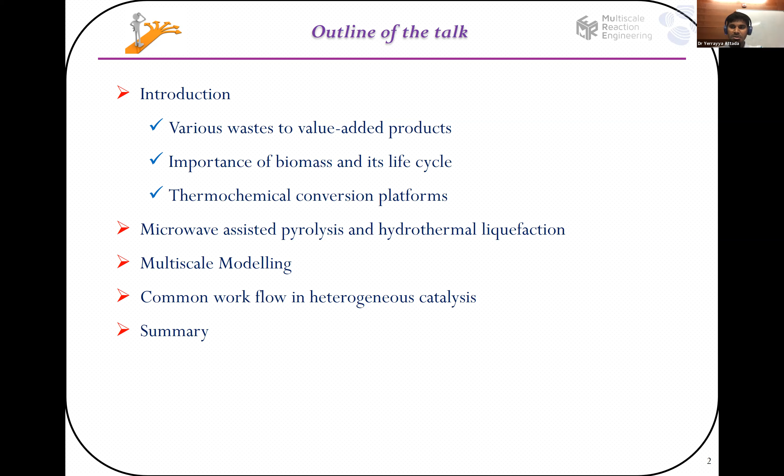Good afternoon, everyone. Today I will discuss the different thermochemical conversion processes available and the ways we can convert waste to valuable fuels and chemicals. This is my topic. I completed my PhD at IIT Madras, and currently I'm working as a postdoctoral fellow in MuRE, the Multi-Scale Reaction Engineering Group. My talk is mainly about the various wastes to valuable fuels, the importance of biomass and its life cycle, and the different thermochemical conversion processes available. I'll mainly discuss my work on microwave-assisted pyrolysis and hydrothermal liquefaction, and after that give a brief idea about multi-scale modeling, and also the common workflow in heterogeneous catalysis from a molecular simulation point of view.

This is my idea of the different ways available to convert waste to fuels or chemicals. You can see here CO2, a global warming greenhouse gas, and CH4, methane, converted to hydrogen, and ammonia to hydrogen - there is value there. Biomass includes various types like plant agro residues and food waste, residues from industries, and municipal solid waste like plastic waste and construction material. All of this needs to be processed using different processes, which I'll discuss later - this is the whole idea of how these can be transformed into useful fuels and chemicals.

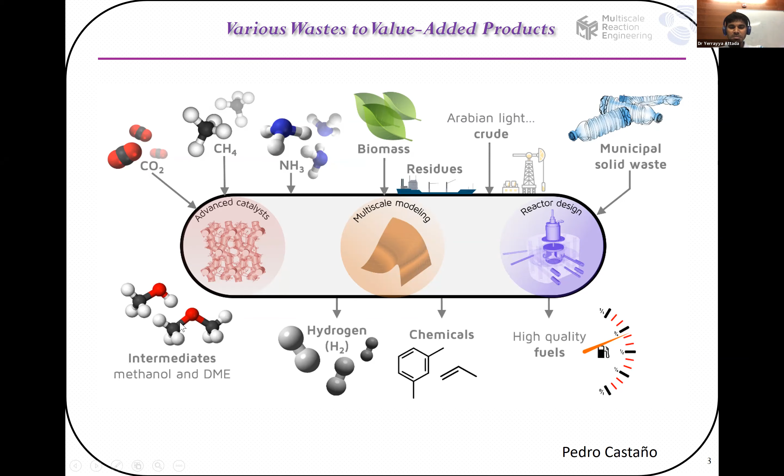From municipal solid waste, biomass, and different kinds of waste, biofuel production is separated into different generations based on the biomass: first generation, second generation, third generation, and fourth generation. First generation is edible fuel - meaning food kind of fuels. We cannot sustain on this because we need food to eat, and we cannot convert these into fuel because of the large population - we need so much food. That's why the next step is second generation.

In second generation there are different biomasses like municipal solid waste, industrial waste, crude glycerin, and straws - these are agro residues. These can be converted to fuel. That is the second generation.

Third generation is algae. You can see algae converted to normal biocrude using hydrothermal liquefaction. This is the best process for algal biomass because it's a wet feedstock - more than 50% water content. That's why we use hydrothermal liquefaction to convert this into biocrude.

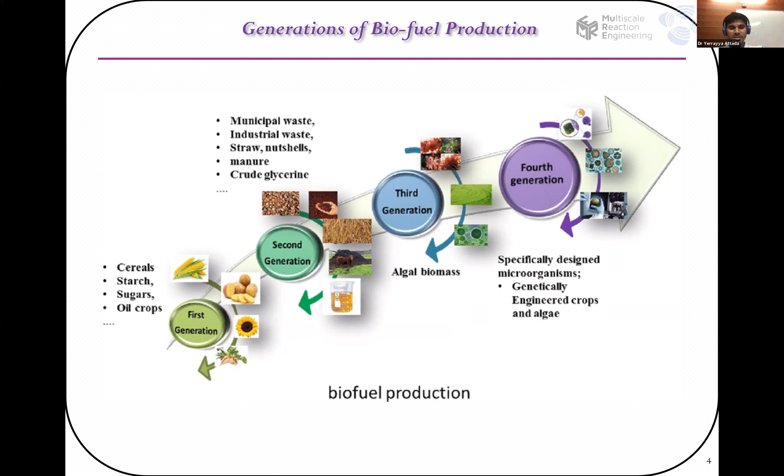Fourth generation is microorganisms. Here you can convert these also like algae into fuels. These are the four generations, and we are mainly focusing on second and third generation to convert waste into fuels. I'm showing here the global and India scenario - what generations are more common, like municipal solid waste.

Here you can see India generates around 11.95% of municipal solid waste, and China generates 15.55%. United States generates the same as India, but has a less population compared to India—India has 18.05% of population and US has 4.4%. That means the more generation of municipal solid waste, per capita, is in the United States.

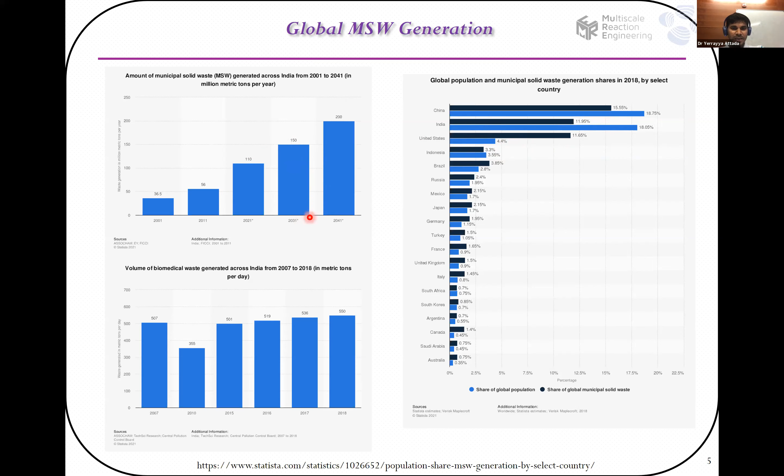We can convert this municipal solid waste into useful fuels by using different processes. I'll explain better in the next slides.

This is how you can reduce municipal solid waste through waste management. First are the 5 R's. The first one is reduction—you need to reduce as much as possible the consumption of plastic, mainly plastics, because we can reuse waste into its current form.

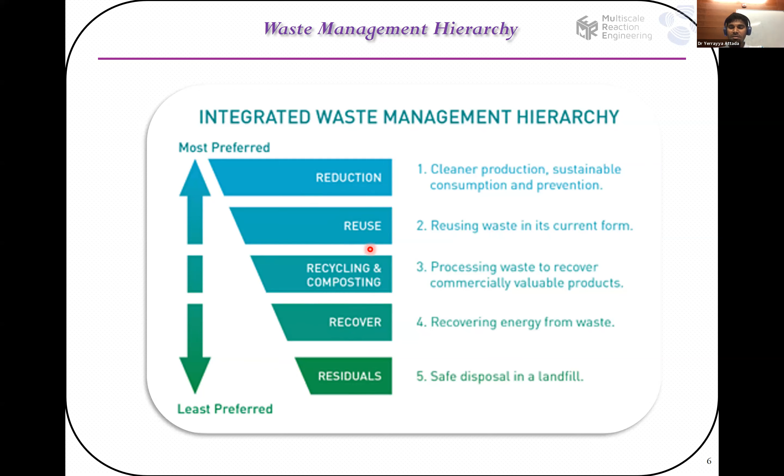The next step is reuse—you can reuse that plastic again and again. Then recycle—you can generate different valuable products by using these plastics. The fourth one is recover—you can use different thermochemical processes to convert the waste to energy. And the final one is landfill, where you dispose safely. These are the 5 R's you need to keep in mind to use plastics in a valuable manner.

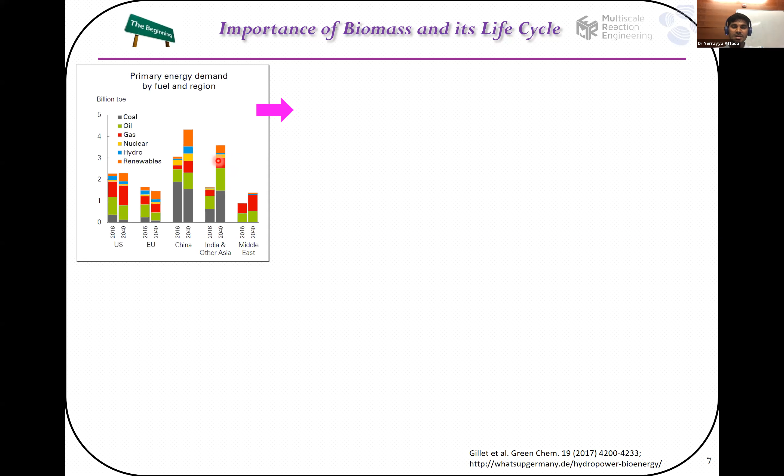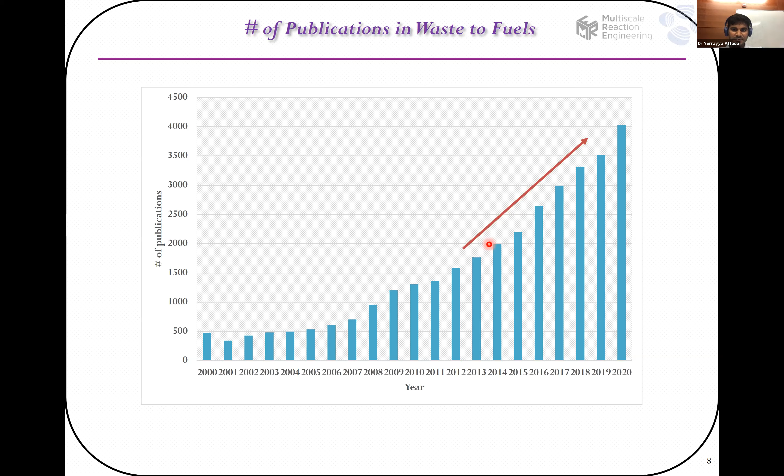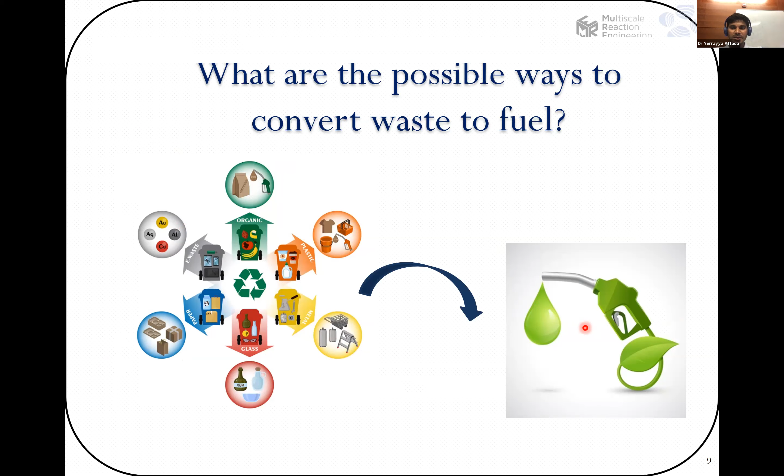This is the main aim: what are the possible ways to convert waste to fuel? These are the different ways you can convert it into useful fuel. I'll explain in the next slide the different thermochemical conversion processes available.

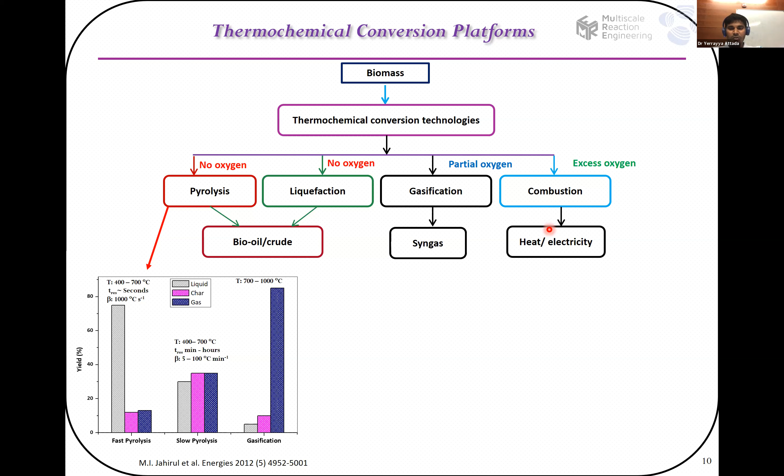Combustion is mainly used for heat and electricity. The major problem when we use combustion with biomass is the ash percentage in biomass. It will create a problem of sintering and fouling of the reactor.

These are different companies looking at converting plastics to biofuel. This one is from Paterson Energy, a Chennai-based company. They generate almost every day 1 ton of plastic, converting it to 800 liters of fuel, which can be used as furnace oil, and they can upgrade it to gasoline using hydroprocessing technology.

There are different companies available. Here you can see clean burning fuel made from used fryer oil from restaurants and commercial kitchens - they use those oils to convert them to normal fuels. Here, Sierra Energy uses a gasifier to convert waste to syngas, then converts it to methanol using Fischer-Tropsch synthesis, which can be used for other chemical processes.

Here they use municipal solid waste, hazardous waste, and medical waste also. Whatever the waste, they do gasification and convert it to useful chemicals. And here also you can see plastic to oil - they transform plastic waste into fuel with 86% conversion efficiency. These are the major companies available in this space.

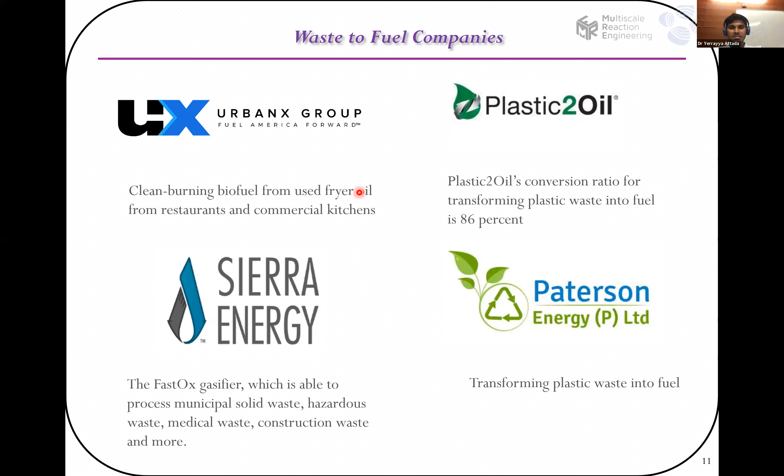This is a case study. When we use COVID-19 masks, these are also converted to useful fuel. This is a major amount - these masks are just thrown out after single use. We use disposable masks, and they are converting them to fuel. This is the scenario nowadays, because from 2020 onward, this is happening.

There's huge waste generation, and this is just pyrolysis they are doing - converting it to fuel range hydrocarbons. That is the main advantage of using pyrolysis, just generating heat or fuels.

This is a simple experiment, not much cost involved. You can just take a tubular furnace, a normal furnace, and heat it directly using a quartz tube. These are the quartz wool - they insert the feedstock on both sides, and then the vapors generated by heating this feedstock are sent to an ice bath, because we need to get the liquid by condensing this process, and then they send it to the micro GC.

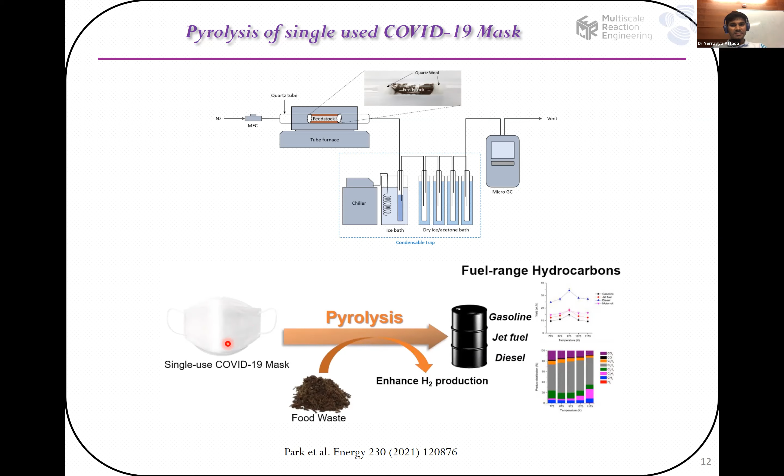This is the homemade setup we are using in IIT Madras. This is a research grade setup, but we can use a normal microwave, homemade microwave, to convert it for reaction purposes. Actually, in IIT Madras, we started with a normal microwave, same as what is available in homes, and that can be converted to a reactor as an initial step in microwave pyrolysis. But nowadays research grade microwaves are also available to convert this waste into useful products. This is just a normal procedure, and this is a research grade one.

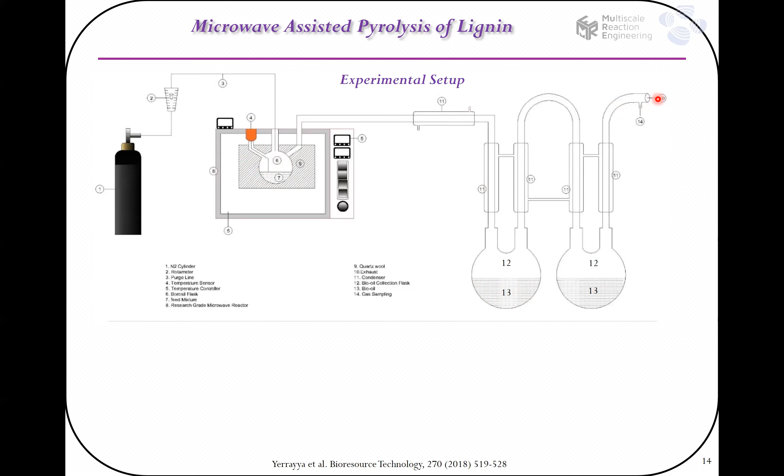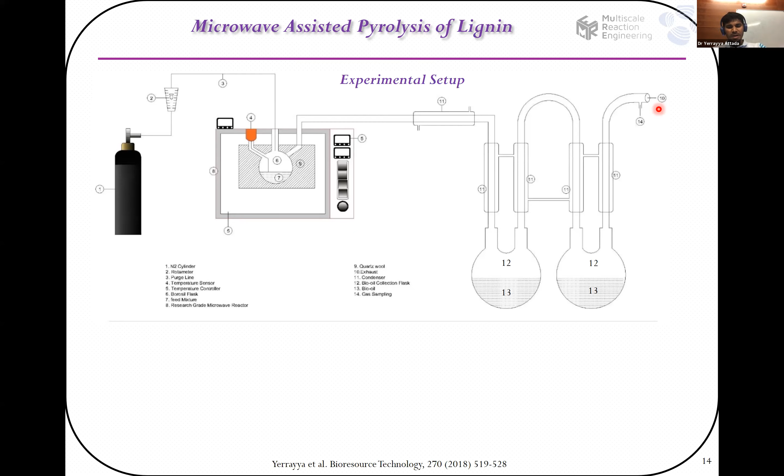Here this is a normal Borosil flask as a reactor, and these are the different K-type thermocouples we are using. The microwave heats the reactor at an operating temperature of nearly 600 degrees centigrade, and then the generated vapors go to two condensers, which we use to collect the oil. The final gas can be exhausted out, or we can collect these gases in a balloon, and you can reuse this gas for heating purposes, like normal homemade heating or whatever, we can heat it using this gas.

These are the analyses we can use on the bio oil, like elemental analyzer, which will give you the composition of the bio oil, such as carbon, hydrogen, nitrogen, and amount of oxygen. And when we use HHV, this is by using a bomb calorimeter, you can calculate the heating value. GCMS will give you the compounds involved in the bio oil. These are the major analyses of biocrude, and there are also some other advanced techniques.

Those are SIMDs, simulated distillation, where you can directly get what compounds are there, it will give you a spectrum directly. And GCGC, there are different techniques available to identify the compounds in a bio oil.

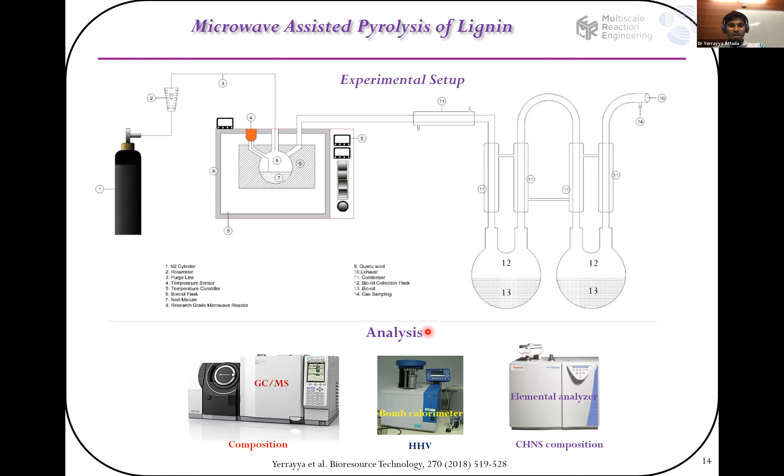These are the things you can see here, when I'm using microwave assisted pyrolysis of lignin. I have already shown lignin has a more amount of phenolic compounds. Here you can see the lignin. When we increase the lignin to activated carbon ratio, this susceptor is used in microwave pyrolysis to heat the feedstock fast. The advantage of the susceptor is that it heats the feedstock, because the feedstock has a low dielectric constant, that's why you need to use a susceptor as an absorber.

And at 10:90, this is the different spectrum, different composition available. You can see here simple phenols, guaiacols, and syringols are the most generated ones, because lignin contains more amount of phenolic linkages, meaning it will convert to more amount of phenols.

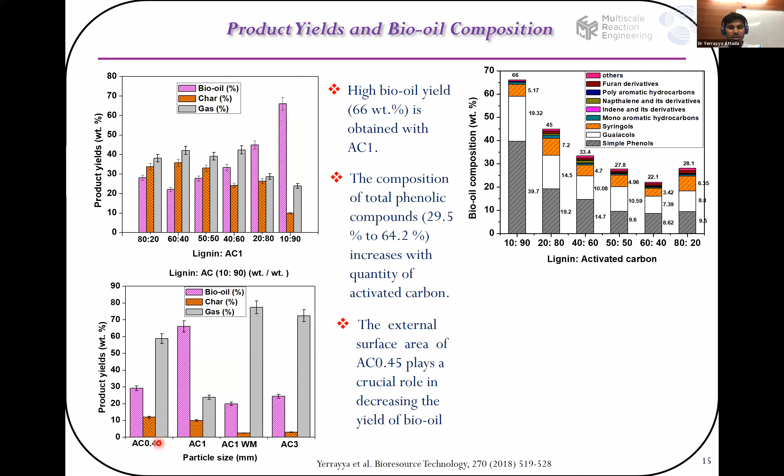If you see, using different amounts of carbonaceous susceptors, that means activated carbon 0.45, activated carbon 1, and activated carbon 3 — these are different sizes of activated carbon — activated carbon 1 gives you a high amount of bio oil. This is because the moisture present in the activated carbon is less, and the external surface area is medium compared to activated carbon 0.45. Activated carbon 0.45 has a higher amount of moisture, which converts to less heating, meaning it converts to bio oil at a very low percentage. You can see activated carbon has the highest amount in all the cases.

The simple phenols, guaiacols, and syringols are the major amounts because lignin contains more amount of phenolic linkages.

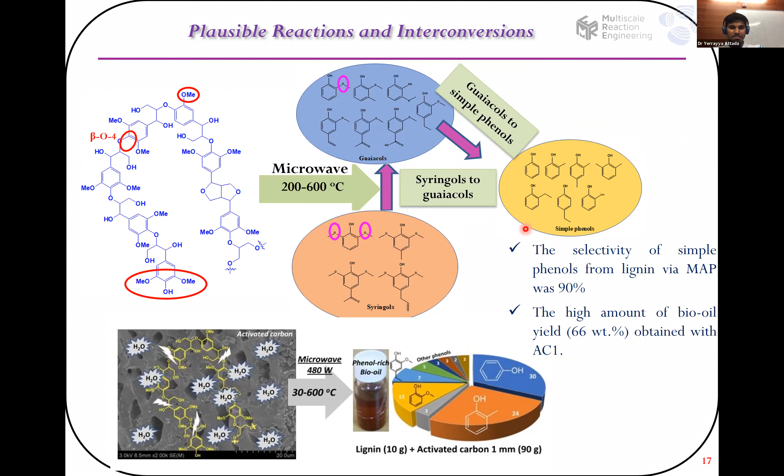And the next one is hydrothermal liquefaction. If you have any questions, please stop and ask. That's not a problem.

Here in hydrothermal liquefaction, you can see the difference between pyrolysis and liquefaction. In pyrolysis, drying is necessary, but in liquefaction there is no need of drying. The temperature for pyrolysis is 350 to 650, and for liquefaction it's 200 to 400 degrees centigrade. That's not the important part, but you can see the oxygen content and heating value - these two are the main important factors. Oxygen content is 10 to 20%, and heating value is 30 to 40, meaning very high heating value, same as gasoline and diesel.

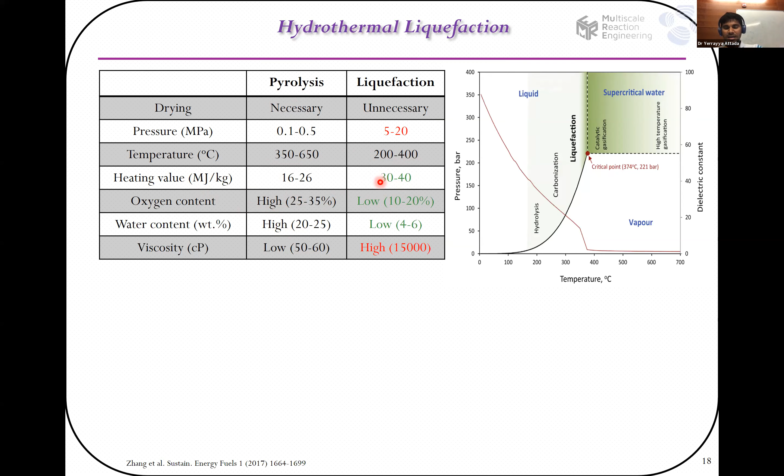The main use of hydrothermal liquefaction is - you can see here - fossil fuels are formed by exposure of biomass to high temperature and pressure underground for many years, whereas a liquid fuel in HTL is obtained within hours or even minutes. That is the main advantage - we can generate biocrude within hours or even minutes by using hydrothermal liquefaction.

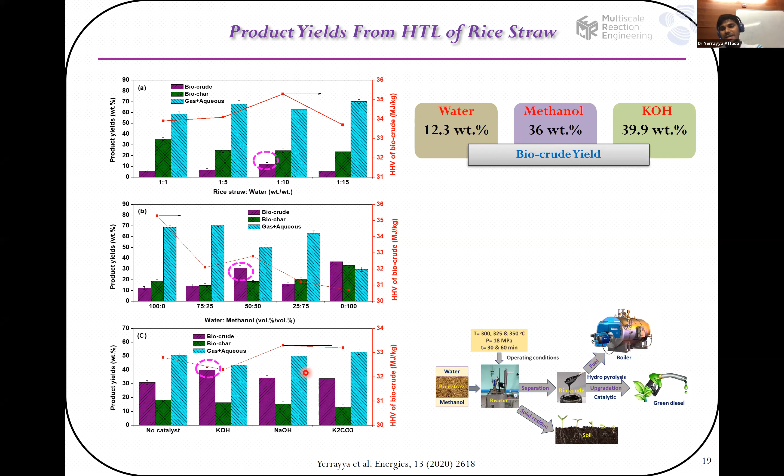You can see when we use water as a solvent, we got 12.3% biocrude. When we add methanol, it increases to 36 weight percent. When we add catalyst to the already available methanol and water ratio, we got 39.9 weight percentage, with HHV also in the range of 31 to 35. We also calculated the energy consumption ratio and energy recovery of the system.

And here you can see the comparison. This is

Company detail, Reliance Industries. They are using different processes here. First one is just power generation, second one is biochemical process, third one is catalytic pyrolysis and anaerobic digestion, and fifth one is HTL. You can see comparison between the efficiencies, the thermal efficiency between different processes. Here the thermal efficiency of hydrothermal liquefaction process is higher, that is 66%, because you can use wet biomass directly compared to normal biomass. When we use dry biomass, it needs more energy consumption compared to wet biomass processing. That's why thermal efficiency is 66% for hydrothermal liquefaction.

This is from Reliance Industries. They are already doing hydrothermal liquefaction process at pilot scale. They have already done lab scale, and now they are going for pilot scale. It's not yet commercialized, but it's going to be commercialized, because it has more advantage compared to normal pyrolysis.

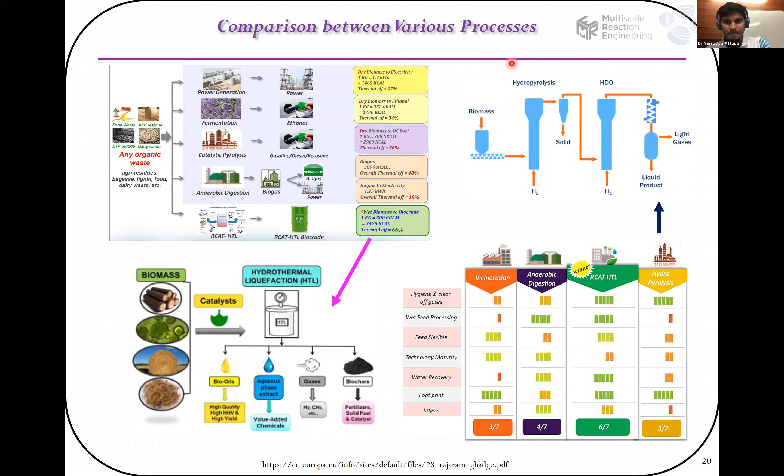Yeah, this one. Actually here there is a more amount of phenolics, that's why its color looks clear. And if you see, lignin-to-activated-carbon has a more amount of tar compounds. Tar compounds means polyaromatic compounds, that's the recombination of single phenolics to normal aromatics to polyaromatic conversion. That's why it looks like a more tarry kind of thing. That's what I explained here.

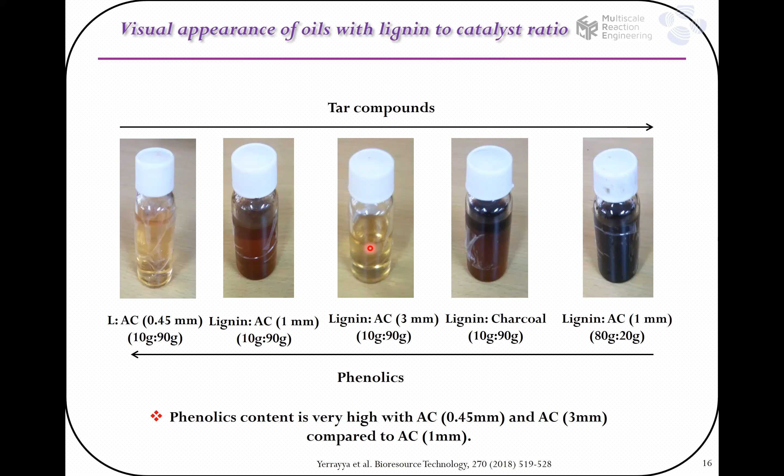Yeah, this is a Van Krevelen diagram. This is how people decide oxygen-to-carbon ratio versus hydrogen-to-carbon ratio. If you see biomass has the highest oxygen-to-carbon ratio and also a certain hydrogen-to-carbon ratio. If you see plastics, they have a very high hydrogen-to-carbon ratio and low, less than 0.1, oxygen-to-carbon ratio. The main aim is to convert this biomass to this range, like the plastics range.

That is the aim of this thermochemical conversion and upgrading processes. When we use initial biomass in normal pyrolysis, it will convert to something like plastics or bio-coal kind of material. But when we use an upgrading process like hydroprocessing, such as catalytic hydropyrolysis, this will convert the remaining oxygen through a hydrodeoxygenation process. If you use hydrodeoxygenation, it will convert it to a gasoline range of fuels. That is the main aim of this biomass conversion process.

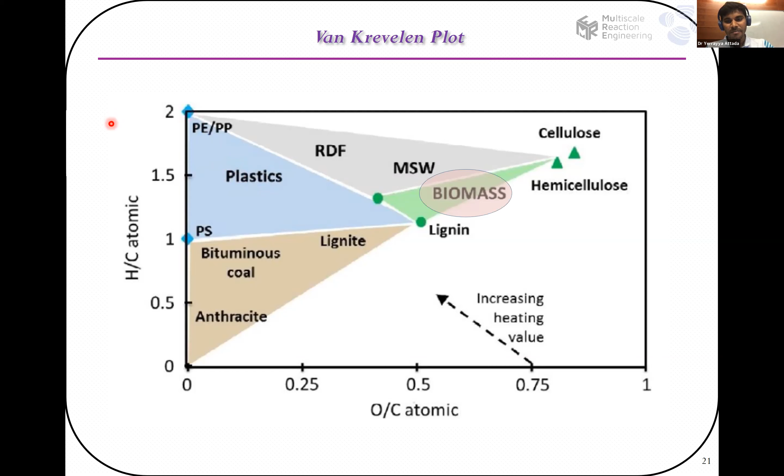Yeah, this is what I am explaining here, these are the different processes. Whatever I mentioned previously will finally go to catalytic hydroprocessing, then convert to gasoline or diesel. Wet biomass can be processed by hydrothermal liquefaction, and solid or dry biomass can be processed by pyrolysis, or you can select gasification. You can do Fischer-Tropsch synthesis and generate wax and send it to catalytic hydroprocessing to produce gasoline or diesel using different types of catalysts.

And here you need higher pressure compared to the normal process. That is one of the factors, and also the choice of catalyst is important here. You need to select a proper catalyst to upgrade the process. Those are different zeolites, bimetallic catalysts, and phosphides. There are different catalysts available, but right now I am not explaining those catalyst steps and preparations.

This is the whole process, just how it goes. Now I am moving to multi-scale modeling. These are the processes, and the final destination is hydrocarbons, mainly gasoline, diesel range hydrocarbons.

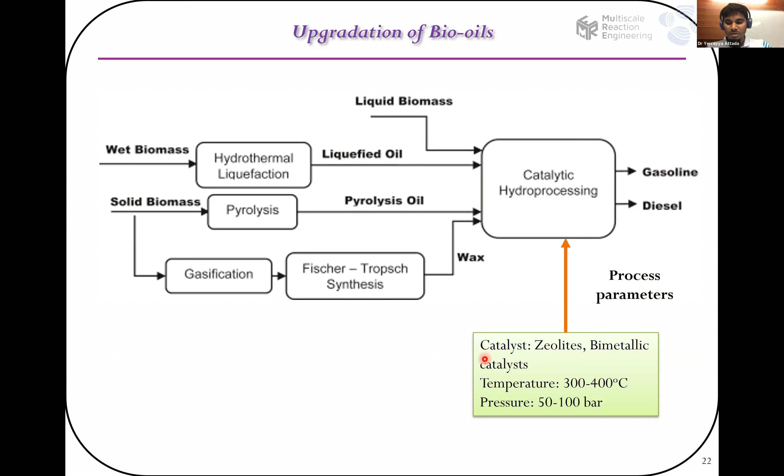Now in multi-scale modeling, there are different scales. Initially, a very atomistic model, that is quantum mechanics or transition state theory, this is a computational chemistry kind of modeling. When we go up, it leads to pilot scale and process and plant simulation scale. When we use quantum mechanics, you will get the kinetic parameters, mainly activation energy, and everyone in chemical engineering knows reaction engineering, these are Arrhenius parameters. What are the Arrhenius parameters here? Like K equals K naught into e power minus E by RT.

Here you can get activation energy and pre-exponential factor. You can calculate the rate constant of that reaction. Then you can calculate the rate of reaction, the whole rate of reaction, from that rate constant. That is the main idea of using quantum mechanics and transition state theory calculations with respect to reaction engineering.

But you can calculate so many properties by using quantum mechanics - different electrical properties, mechanical properties. With respect to chemical engineering point of view, we are mainly focusing on rate of reaction or rate constant calculation. That's why I'm mentioning we can calculate rate parameters by using transition state theory for individual reactions.

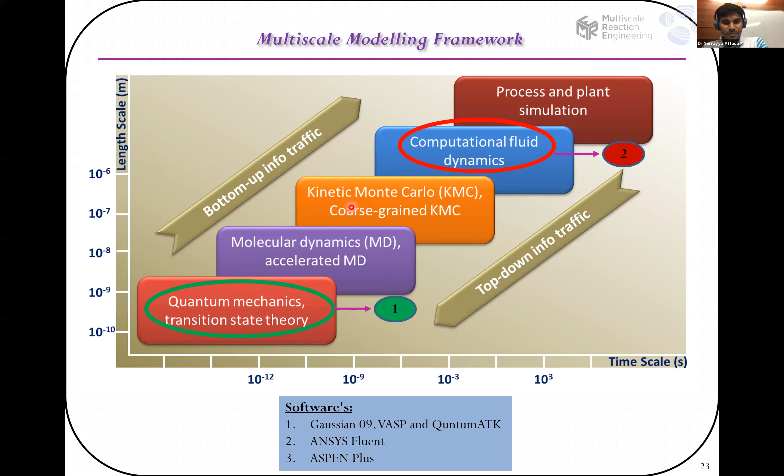In the next step, I will only discuss the computational chemistry point of view - what are the things we can do, and what is the importance of using DFT in heterogeneous catalysis.

When doing experiments, we need to select different catalysts - first select one catalyst and do the experiment. It's almost 8 or 9 hours experiment. Then you need to check again with another catalyst. This is a very trial and error approach and a tedious process. That's why we want to use simulation to get the kinetic parameters for the new catalyst.

You need to design a catalyst by using VASP, and then you will get the kinetic parameters. Then you can do microkinetic modeling further, which will give you the whole idea of the total yield by using concentrations - you get the concentration, then you can convert it to yield.

And you can check by catalytic experiments. Combined with the catalytic experiment, it will give you the whole idea. If you do only one experiment and check the microkinetic modeling, it will consume much less time, and it will still give you the whole kinetic parameters. You can use it for pilot scale also. That is the main idea of doing DFT, experimental, and microkinetic modeling as a whole approach.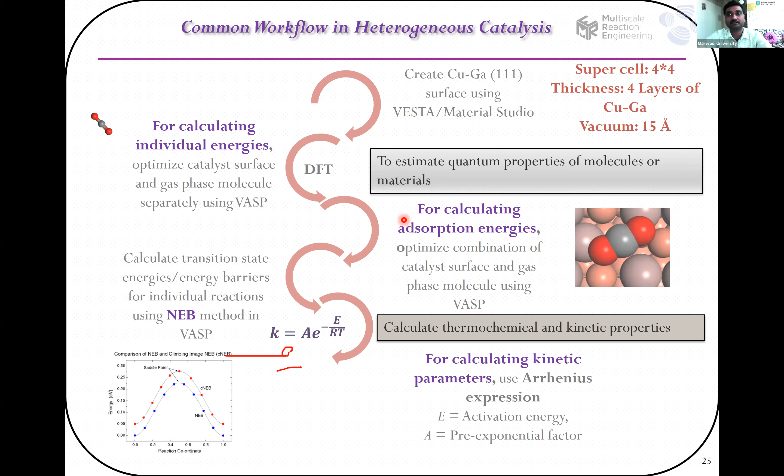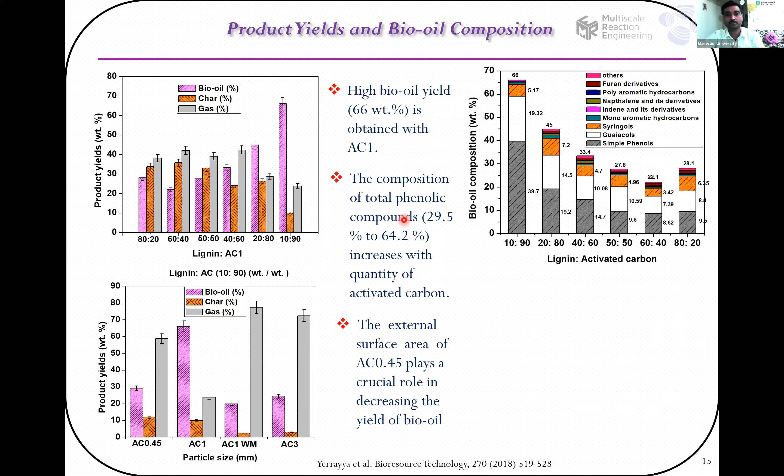Anything you want to share? Actually, there was a question apart from reaction time - which are the other parameters you are controlling or analyzing which may affect the synthesis? I think this question was related to your PhD work.

Which process? I think generally there are different operating parameters, like temperature, pressure, and whatever the feedstock. That is the main effect - feedstock. Also, if you use hydrothermal liquefaction, there is a range of solvent which we need to use.

When we use pyrolysis, you can select the ratio of feedstock to any susceptor. When we use microwave pyrolysis, this is the availability - which kind of susceptor you need to use, and what is the ratio between feedstock and susceptor. That depends on the process you take, the feedstock you take, and the operating parameters. This is not a proper conclusion directly, because different feedstock will give you different amount of oil or whatever the thing we are looking for. That is the main thing.

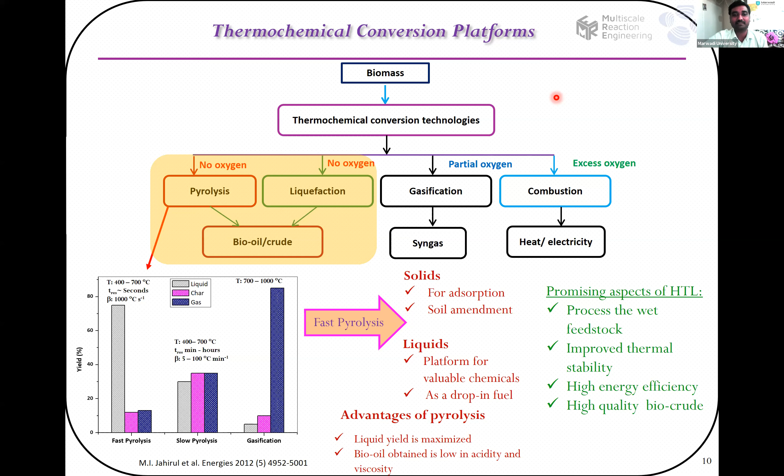Thank you, sir. I feel our main objective was to have knowledge distribution among students across India on major aspects related to sustainability and how we can combine that with chemical engineering. With that, we invited our 3 speakers, and I found students interacted well and asked questions. In the first session with Dr. Uday, they discussed his expertise. Then Dr. Kiran also shared from the IT sector, shared his thoughts, and students cleared all their doubts through discussion. Most importantly, during online sessions there can be some nuisance, but our participants behaved very professionally.

They asked questions and maintained the decorum of this international webinar. So I think now we can end this session with the vote of thanks, since we don't have any further questions from students.

Yeah, okay sir, yes sir. I would like to thank everyone for providing support, GUJCOST, Department of Science and Technology, Government of Gujarat. Apart from that, our management, our professor, our dean academics, dean of faculty of engineering, dean research, dean PG, and even our department head Professor Abhishek Gupta sir, and other faculties. I would like to thank you for your constant support throughout this process. So that's it from this webinar.